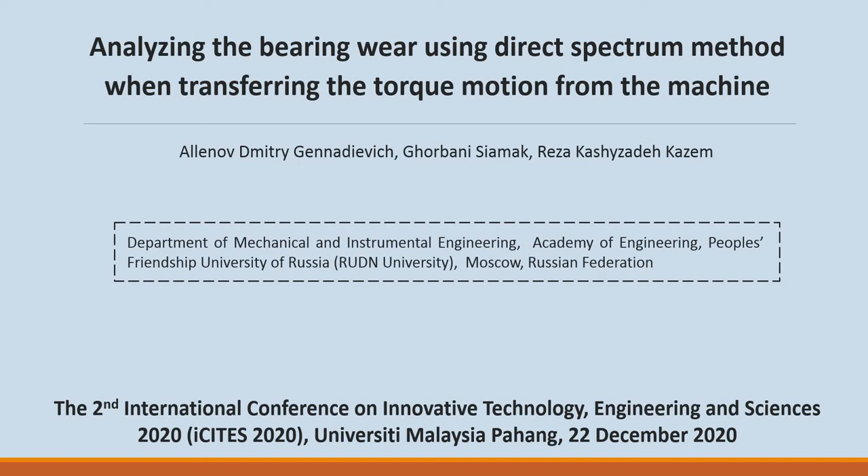The objective of a bearing is to provide relative positioning and rotational freedom while transmitting a load between two parts. The most common type of bearing supports a rotating shaft resisting purely radial loads or a combination of radial and axial loads. The components of a typical rolling contact bearing are the inner race, the outer race, and the rolling elements.

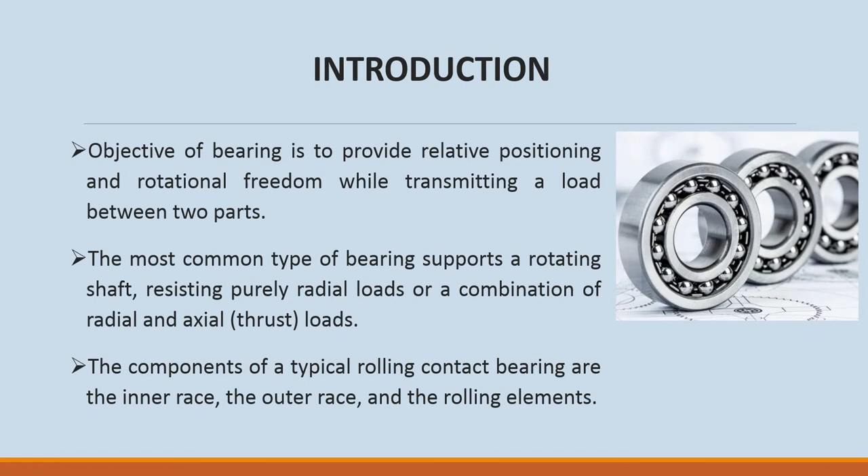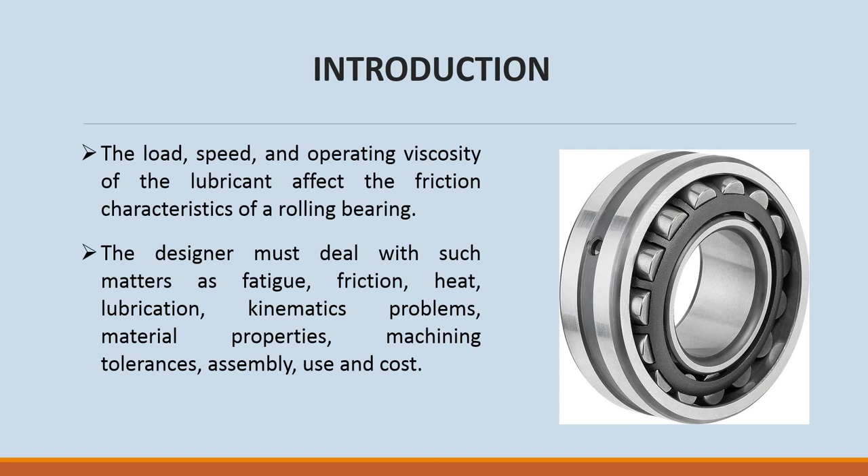The load, speed, and operating viscosity of the lubricant affect the friction characteristics of the rolling bearing. The designer must deal with such matters as fatigue, friction, heat, lubricant, kinematics problems, material properties, machine tolerance, and so on. The main problem is that rolling bearing is subject to various types of loads,

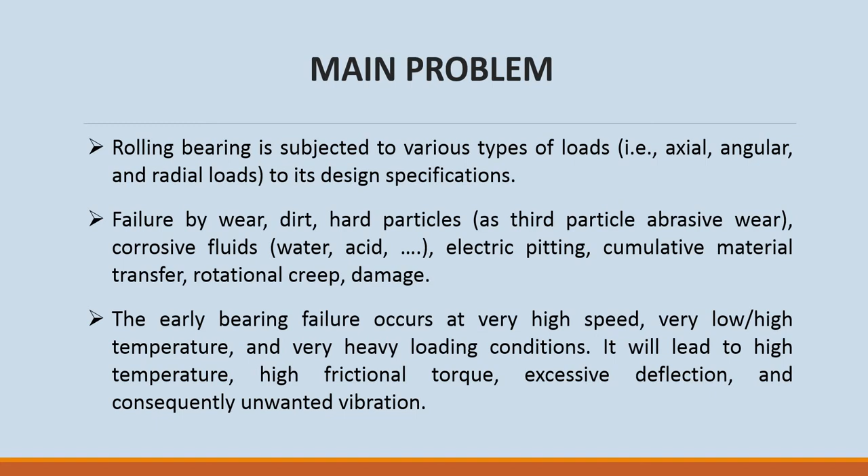and the failure occurs because of wear, dirt, hard particles, electric pitting, rotational creep, and by damage also. The early bearing failure occurs at very high speed, very low and high temperature, and very heavy loading conditions. It will lead to high temperature, high frictional torque, excessive deflection, and consequently unwanted vibration.

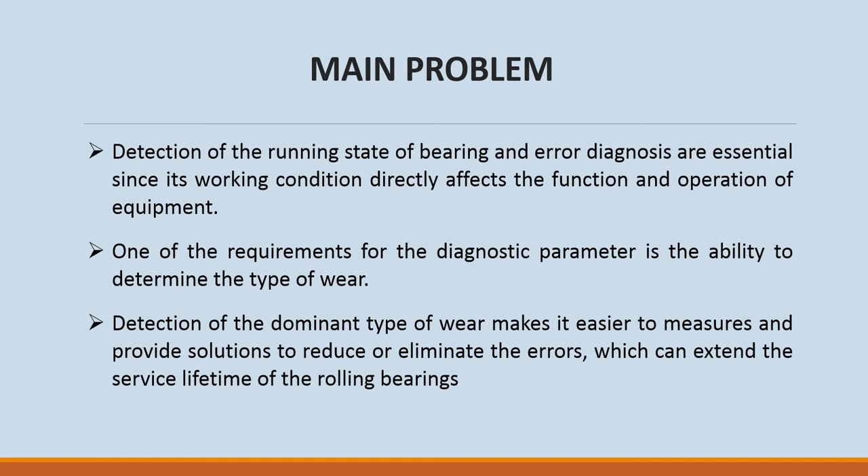So that's why the detection of the running state of the bearing and fault diagnosis are essential. One of the requirements for the diagnostic parameter is the ability to determine the type of wear. Detection of the dominant type of wear makes it easier to measure and provide solutions to reduce or eliminate the error, which can extend the service lifetime of the rolling bearing. Vibration is also an important issue to detect the fault in rotating machines.

The main problem statement of this study is related to diagnosing the bearing wear using the direct spectrum method and proving the advisability of its use during the transmission of the torque motion from the machine tool.

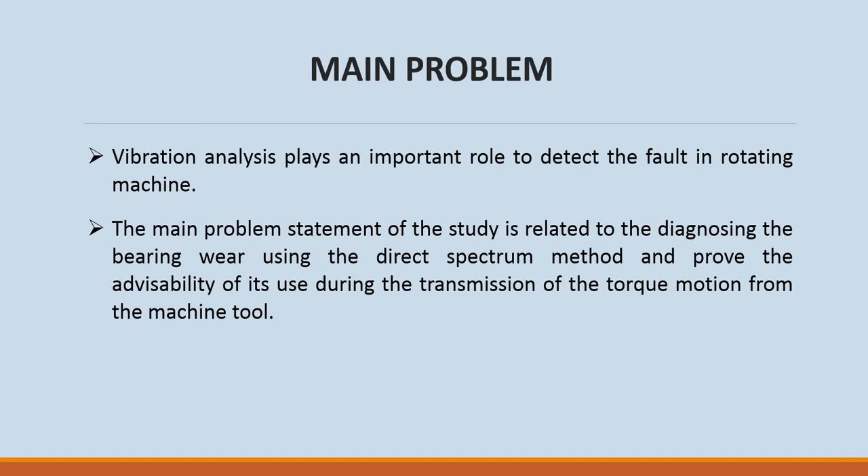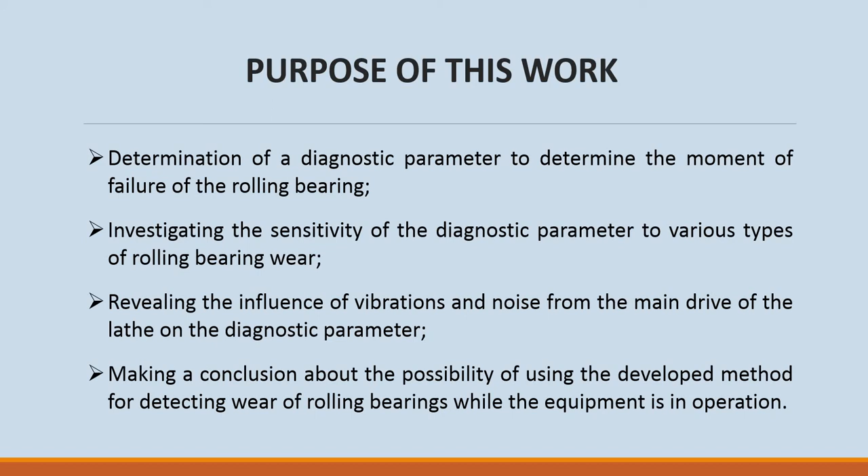For this purpose, we determine the diagnostic parameter to determine the moment of the failure, investigate the sensitivity of diagnostic parameters to various types of wear, reveal the influence of vibration and noise from the main drive of the lathe on the diagnostic parameter, and make a conclusion about the advisability of the applied method.

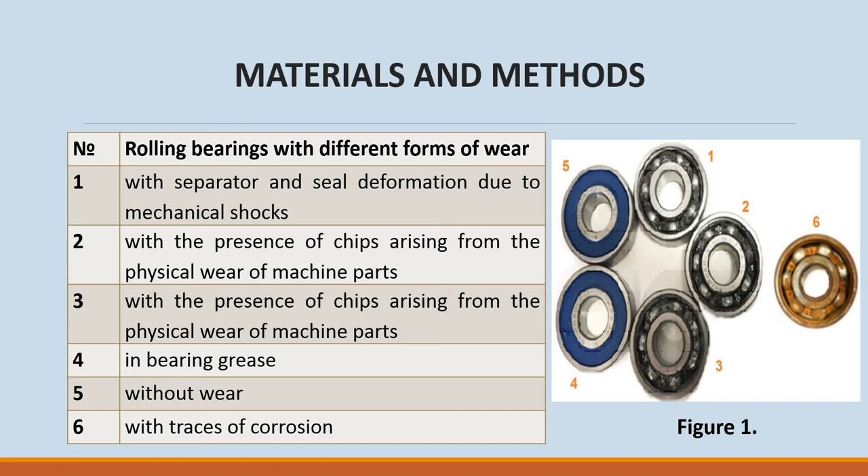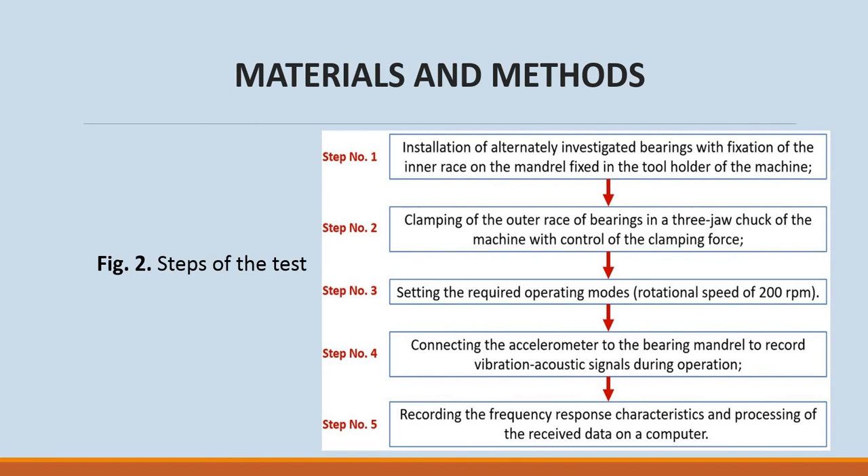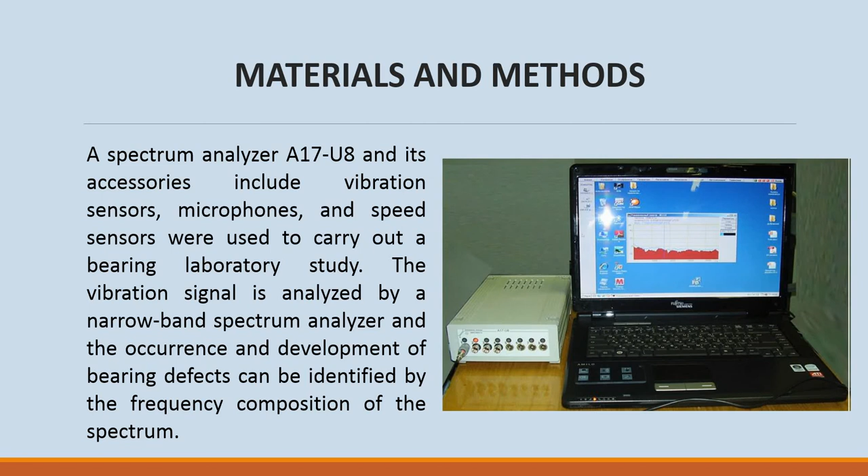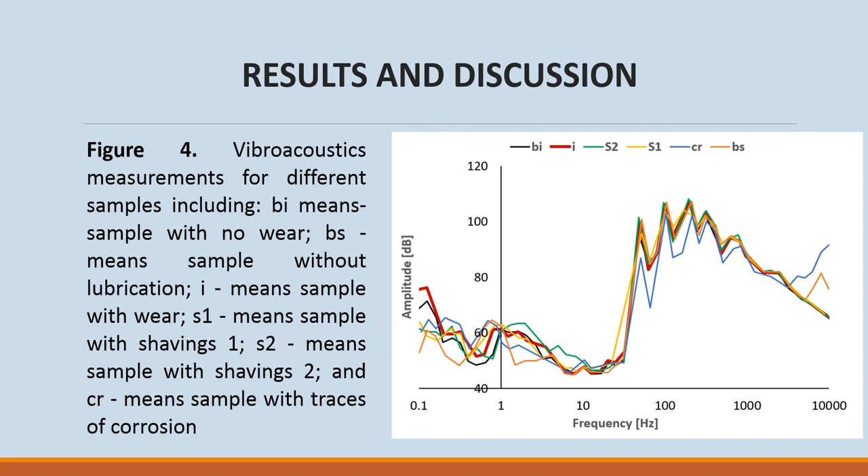and after that we got the result, vibroacoustic signals which indicate that bearing wear in the form of mechanical wear leads to an increase in the noise level in the low frequency range. The noise amplitude of a worn bearing, 59, is 2% higher than that of a worn one, 58. The lack of lubrication in the bearing and the presence of corrosion lead to an increase in amplitude in the high frequency range of 4,000 to 10,000 Hz.

The amplitude of the bearing without lubricant is 104, and the bearing with corrosion is 106, which is 35% and 36% higher than the amplitude of the worn bearing, 68, respectively.

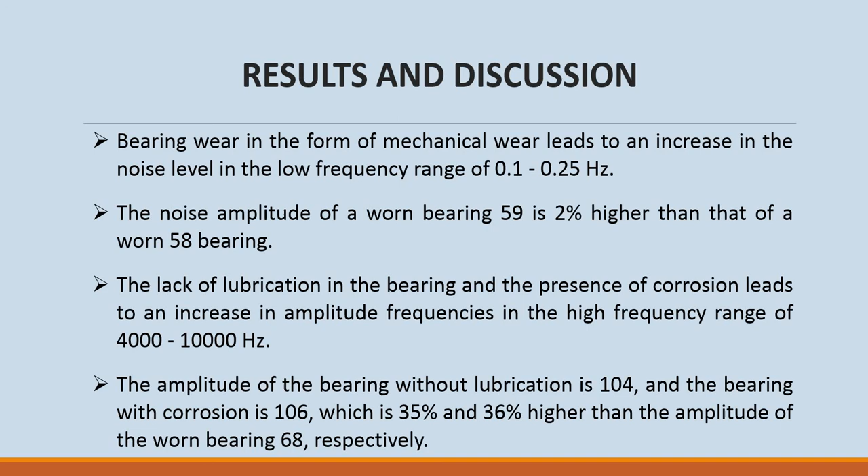The presence of abrasive chips in the bearing lubricant at an early stage of clogging increases the amplitude in low frequency, while the presence of a significant amount of chips in the lubricant increases the amplitude at all frequencies. But this is especially noticeable in the range of medium frequencies.

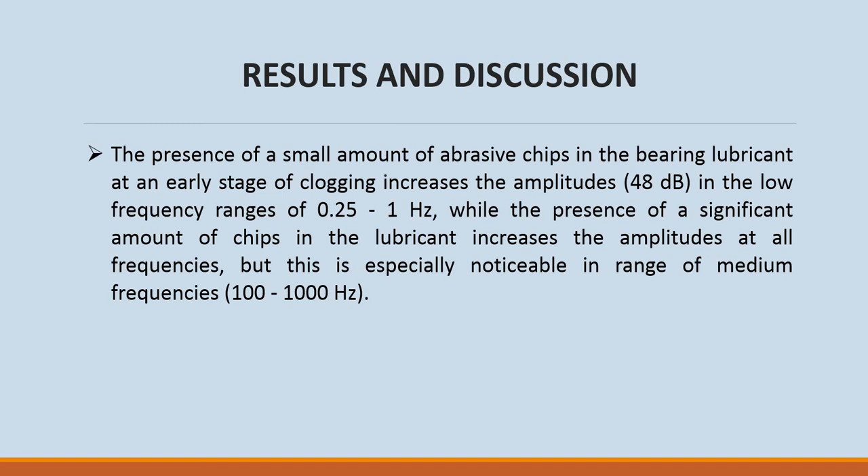So as a conclusion, the obtained data showed that the criteria for comparing the spectra make it possible to detect defects at a significantly lower amplitude of the bearing signal or at a stage of the development of defects. The main advantage of the proposed method is the ability to diagnose the bearing in working conditions without disassembling its units; it reduces the cost of repair work and prevents emergency failures.